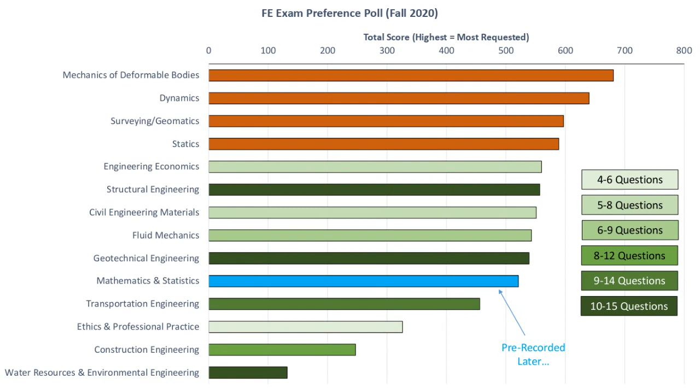All right, let's jump into geotech land. I've got 4 problems, I was gonna do 5 but I'm worried about time. Let me walk through the problems with you, and then we'll get into it. So the first problem, I'd say this is key - very, very high chance you will get a problem like this. This is a soil phase, or index property, problem with air, water, and solids. Here's a sample, here's some properties, compute some other properties. This is a very typical problem on the exam.

The second problem is a classification problem - a soil classification problem. Again, very typical, very high chance you would get a problem like this on the exam.

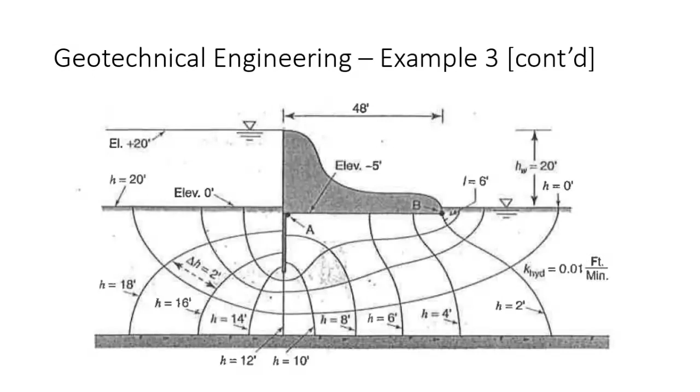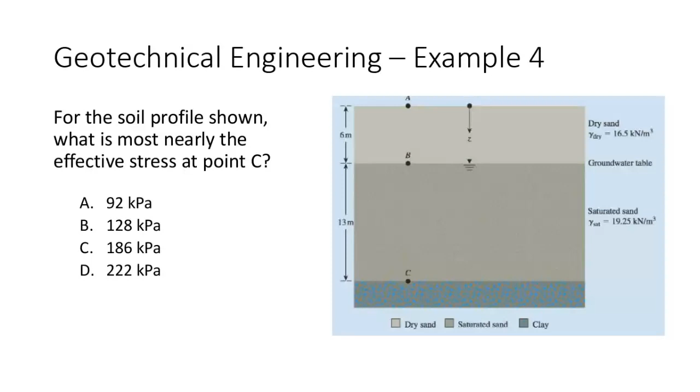The third problem is a flow net. I'm assuming you all have done flow net problems, am I correct? I would say everybody here has experience with a flow net problem. Problem 3 is the same problem - here's a tiny version of the flow net, and here's a bigger one blown up. And then effective stress - I think those are 4 problems that are pretty representative of soils land. Next time we'll try to look at maybe consolidation, maybe some bearing capacity next week, to tie up the big picture. Everybody good?

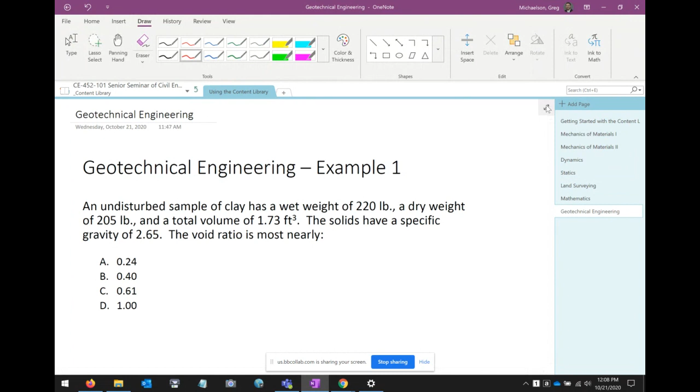So in this problem, we've got an undisturbed sample of clay. It has a wet weight, a dry weight, a total volume. The solids have a specific gravity, and what we're trying to find is the void ratio. This is sort of the way that I learned it - I'm not sure how you learned it. Let me make sure my pen's up. This is how I always learned to do it.

The first thing I would do is draw myself a little column of soil. Let's say this is my soil sample. The soil sample has 3 quantities: it has air, it has water, and it has solid. What I would then do is pick the right side and put all the volumes, and over here put all the weights. You could do this in terms of weights or in terms of mass - everything we were given here was in terms of weight, so that's the easiest way to go about it. So over here on the left, let's start with the left first. Okay, so here's this, here's this, here's this, here's this.

Let's start filling in some things that we know. This problem told us that we have an undisturbed sample of clay, and it has a wet weight of 220 pounds and a dry weight of 205 pounds.

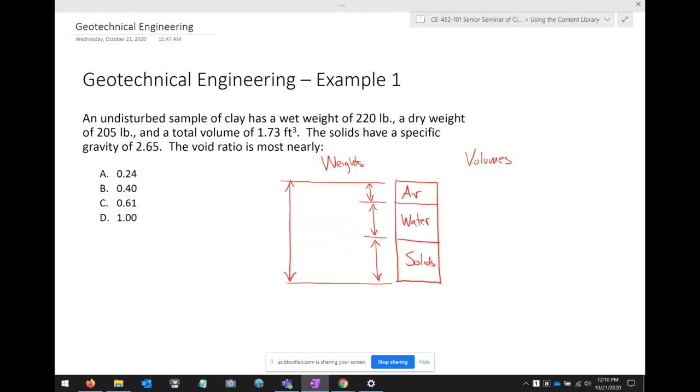The total weight is the wet weight. That's exactly right, so we'll call this WT, 220 pounds. And then the dry weight is the weight of the solids. There we go. So this is the weight of the solids, and this is 205 pounds.

So right off the bat, can we determine the weight of the water and the air? Well, first off, what is the weight of the air? At zero. There you go. The air has no weight. It doesn't mean it doesn't have volume - that's a different story. But it doesn't have a weight.

So what's the weight of the water? If the total weight's 220, so we've got a sample, yeah, it's 15 pounds. You take a sample, put it in the oven, evaporate the water, and it reduces by 15 pounds. That was how much water was in it.

Okay, now let's see what we can do over here with the volumes. Now, one of the things we do know right off the bat is we do know the total volume. The total volume was given to us, that's VT, and that's 1.73 cubic feet. Now, we don't know the volumes of each of the individual components - we don't know volume air, we don't know volume of the water, and we don't know the volume of the solids. But that doesn't mean we can't figure them out.

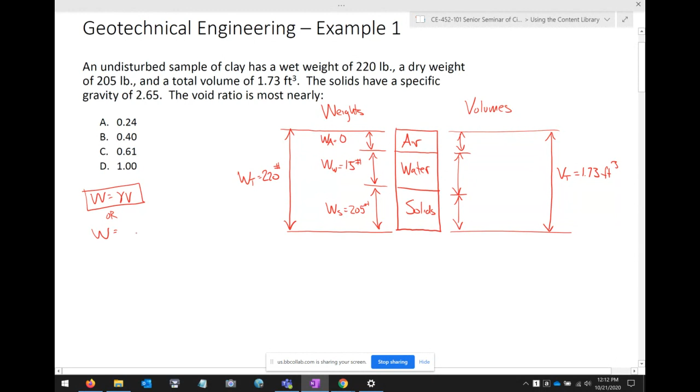So, for example, let's take the volume of the water. We're using a pretty fundamental relationship: the weight is gamma times the volume, or weight is the specific gravity times the gamma of water times the volume. We can write it that way as well.

Either one works. So therefore, I could determine the volume of the water by taking the weight of the water divided by the gamma. But remember, specific gravity of water is just 1.

So the weight of the water was 15 pounds, and then the unit weight of water - y'all better know that number, it should be burned into the back of your memory by now. What is the unit weight of water in American units? There we go, 62.4 pounds per cubic foot. When you chug it out, it's 0.24 cubic feet. So the volume of the water is 0.24 cubic feet.

All right, what about the volume of the solids? Well, what I'm going to do for the volume of the solids is take the weight of the solids divided by the gamma of the solids. The problem is I was never given the gamma of the solids on this problem, but I was given the specific gravity of the solids. So I can say the weight of the solids divided by the specific gravity times the gamma of H2O.

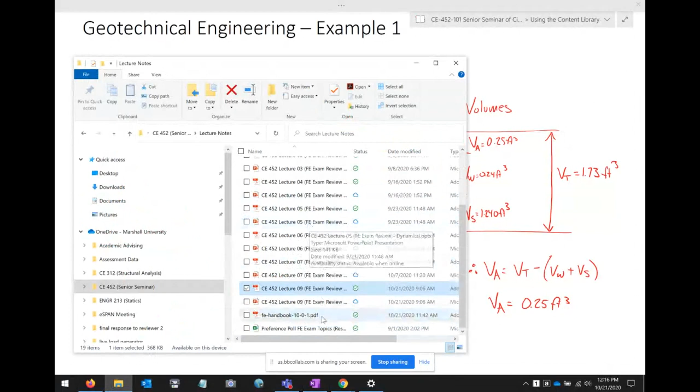Remember, you do have this FE reference handbook. Remember that?

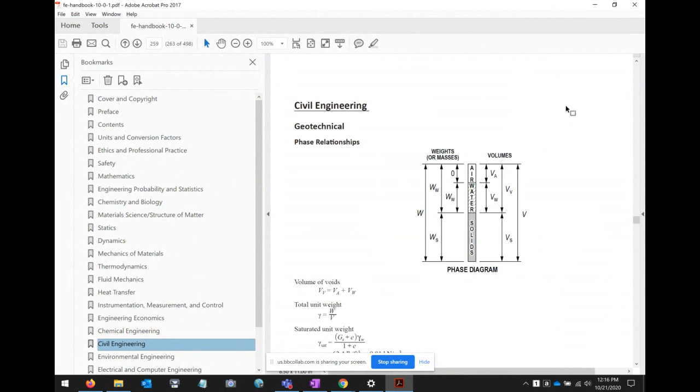The void ratio is the volume of the voids divided by the volume of the solids. It's right here in the civil engineering section of the reference handbook, literally the first section. And what is the volume of the voids? It's the volume of the air plus the volume of the water. So therefore, the void ratio, volume of the voids over volume of the solids, is the volume of the air plus the volume of the water over the volume of the solids.

So that's 0.25 plus 0.24 over 1.24. When you chug that out, you get 0.40.

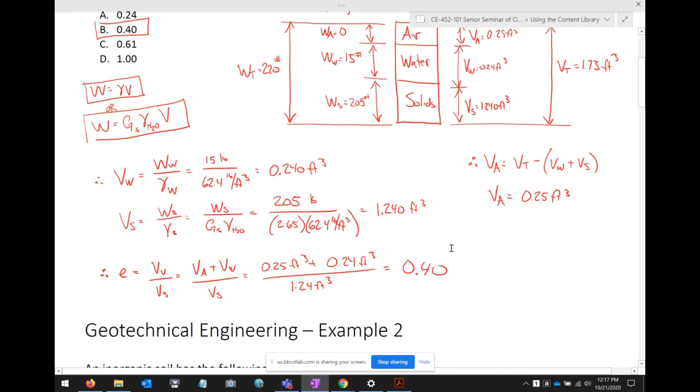All right, are there any questions on that? Hopefully that's like shaking the rust off, if you will, on the geotech stuff. Let me move this down a bit so I can scroll this up and give you all a second to see if you're wanting to copy this down. Any questions?

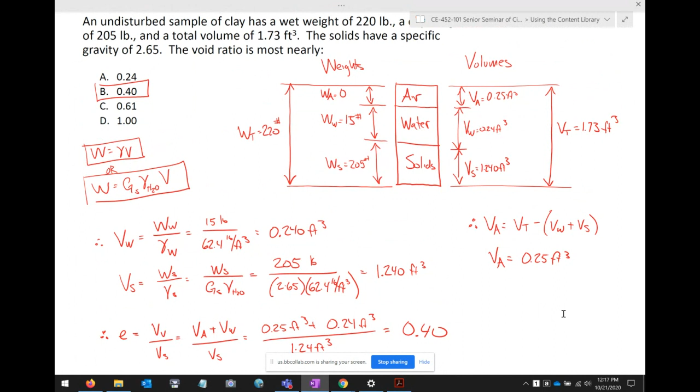Oh, sorry, I keep scrolling. I don't know what's going on. My tablet's being very sensitive today.

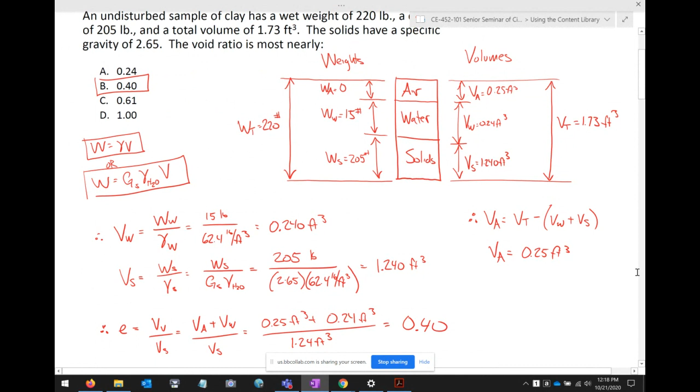Okay, let's get into problem 2. This is another problem, maybe not using this system, but the concept of classifying a soil. This is very typical of something you would get on the exam - you're given a soil with a set of properties and then determine its classification. So an inorganic soil has the following characteristics: 69% fines, a liquid limit of 72, and a plastic limit of 48. Using the USCS system, Unified Soil Classification System, what is the soil's classification?

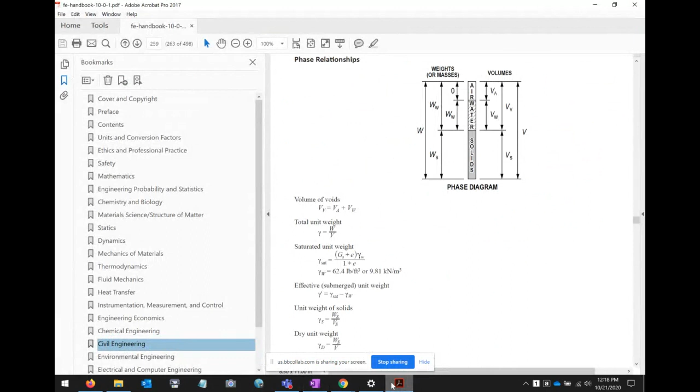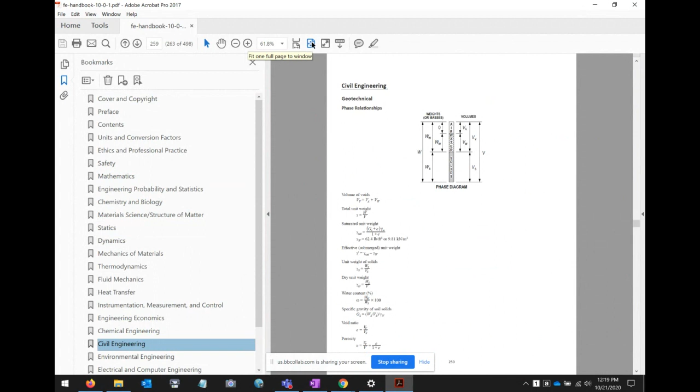So in order to do this, you really need the reference handbook. Let me go to the handbook. Here's the cover, here's the beginning. When you go through the sections and bookmarks, we've got the section on math, statics, and so on. If I go to civil engineering, the first section within civil engineering is geotech, which, by the way, is just generally a good idea to look through because there's a lot of really good stuff in here.

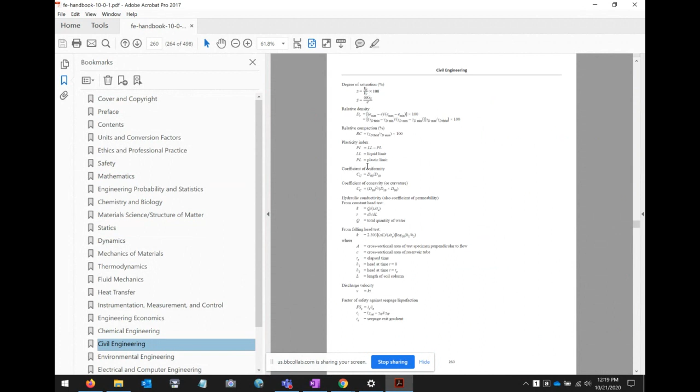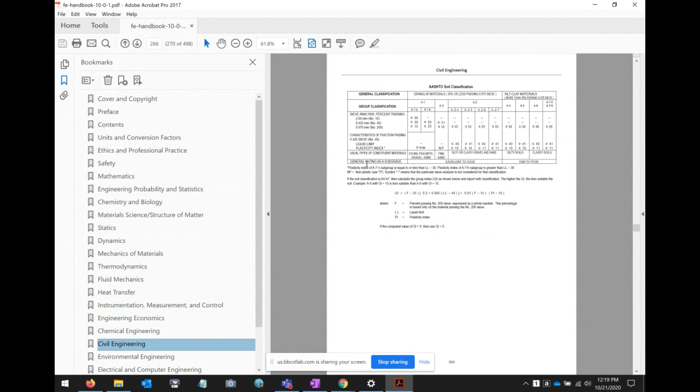You've got soil phase relationships, other index properties of soils, consolidation and settlement, time factors for consolidation, Coulomb failure criterion, horizontal and vertical stress profiles, Ka and Kp for retaining wall folks, ultimate bearing capacity, sliding and slip failures, AASHTO soil classification, and USCS soil classification. So we're going to be using this during this problem.

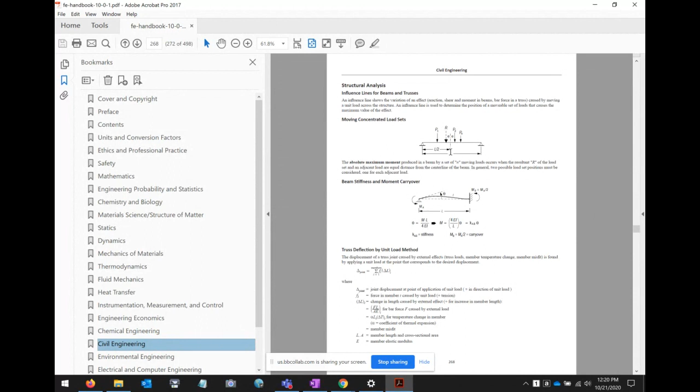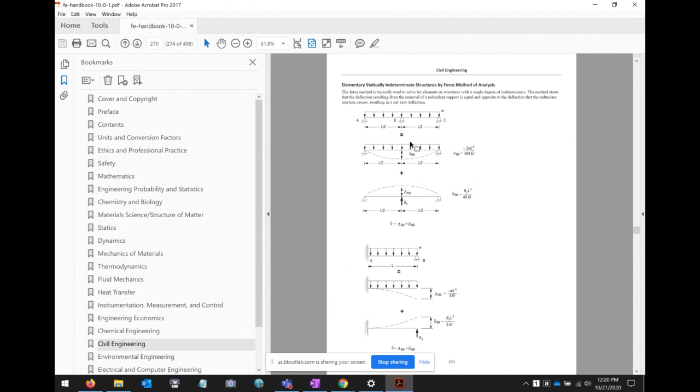If you go into my world in structures land, we have influence lines, truss deflection by the unit load method - the same thing we just got done with for those of you in structural analysis. Frame deflection, beams and frames, the unit load method again. Some stuff in structures we're going to be talking about later. And for those of you who have had steel and concrete, you probably recognize some of this stuff. But let me get back to soils land.

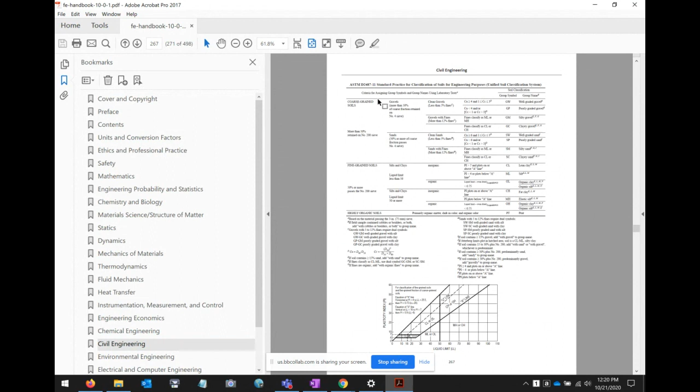For those of you in some of these classes right now, structures or geotechnical, it's worth taking a look at this and going through it - there's a lot of really good data here. What I did on the notebook is screen cap this page and put it here so it's a little bigger so we can read what's going on. Let me actually make this even bigger.

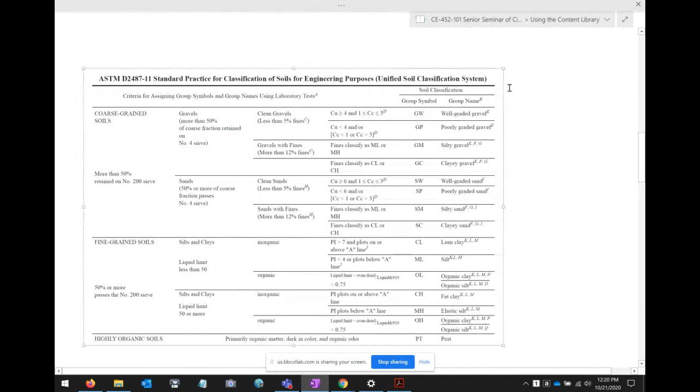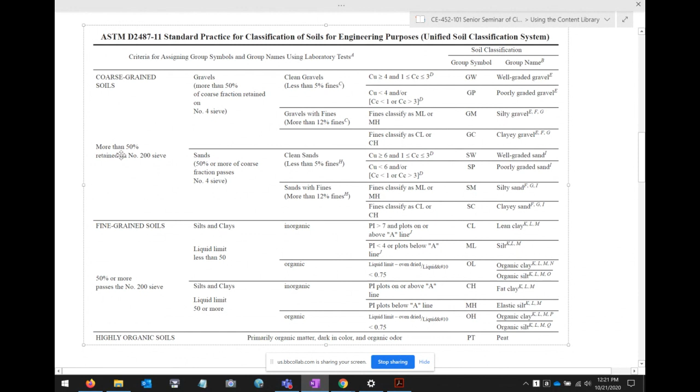Okay, so we've got to classify this soil. Let's see if we can go through this chart and figure it out. If you remember from soils, you basically start at the left and work your way over to the right to get your classification. So first off, starting at the left, are we going to say this is a coarse-grained soil, a fine-grained soil, or a highly organic soil? Well, I can tell you we're not going to say it's highly organic because it literally says it's inorganic right here. So is it coarse-grained or fine-grained? Let's look at coarse-grained - what are the requirements?

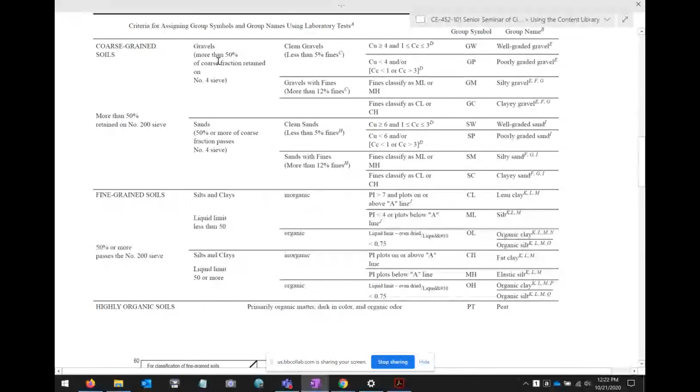It says more than 50% retained on the number 200 sieve. Remember, anything that passes the number 200 sieve counts as percent fines. This is going to be a fine-grained soil because 69% of the soil is fine. So it's not a coarse-grained soil, we're not dealing with a sand. We're dealing with something pretty silty, really tiny particles, so we're definitely going along this line.

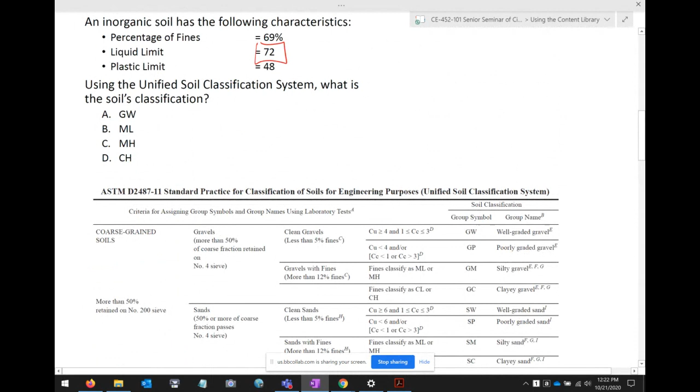So then we go to the next column, and we have to ask ourselves which set of rows do we go through. The question becomes whether or not we're looking at the liquid limit. If the liquid limit is less than 50, we go to the upper set; greater than 50, we go to the lower set. The liquid limit here is 72, so with a liquid limit of 72, we're going to go here.

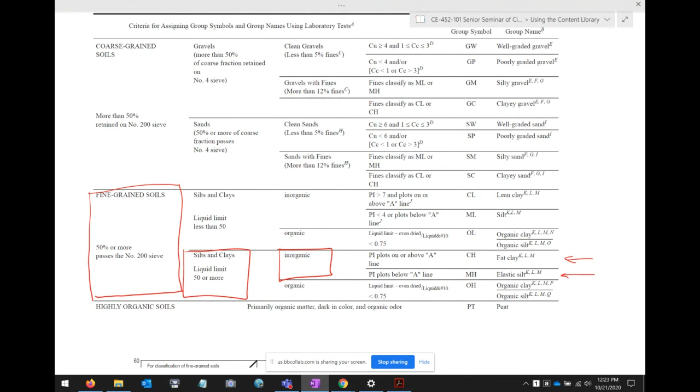And we have the question of whether or not it's inorganic or organic. We already said it was inorganic. Then basically we're stuck with these two choices: the fat clay or the elastic silt. The difference between which one we use is a function of whether or not the PI plots above or below the A line on this chart.

So we need the PI, the plasticity index. Anybody remember how to compute the plasticity index? How do we compute it? Anybody remember that from soils? If you don't remember it, you've got the reference manual. And by the way, everybody in here created an NCEES account - you can download the reference handbook from your NCEES account.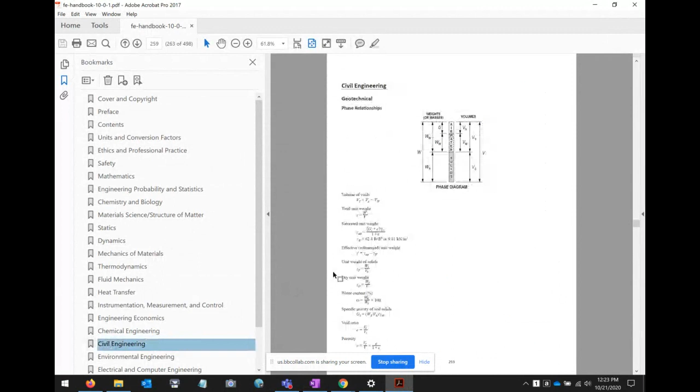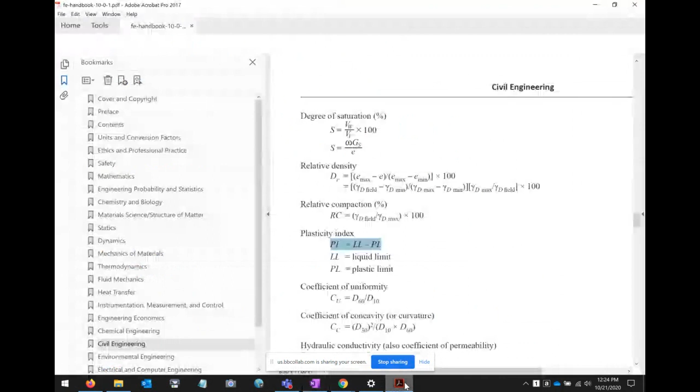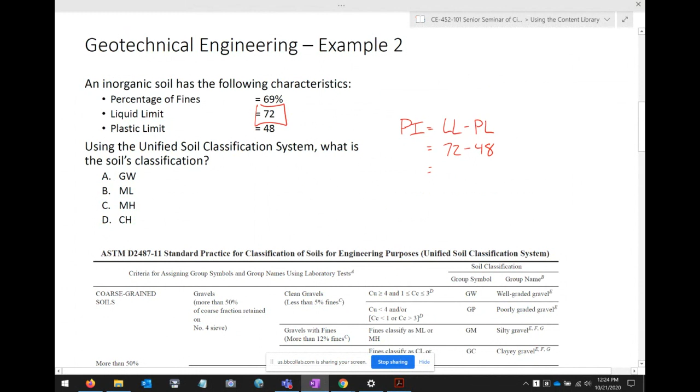Anybody remember this? Let's see. Remember that right there? The plasticity index is the liquid limit minus the plastic limit. So, liquid limit minus the plastic limit: 72 minus 48. So 72 minus 48, what is that? 24, right, 24.

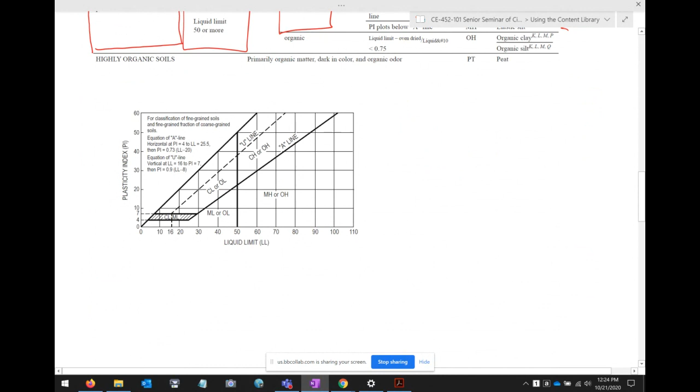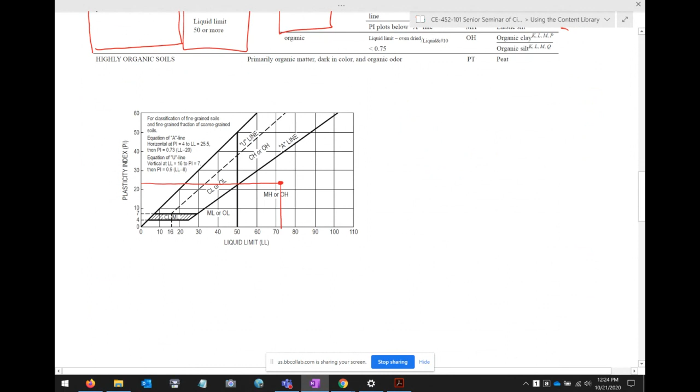So I go down here, the liquid limit was 72, so it's going to be like right here. 24, maybe right there. And so that plots - this is the A line, so we're well below the A line. If we're below the A line, we are dealing with an elastic silt. And so our ASTM classification would be MH.

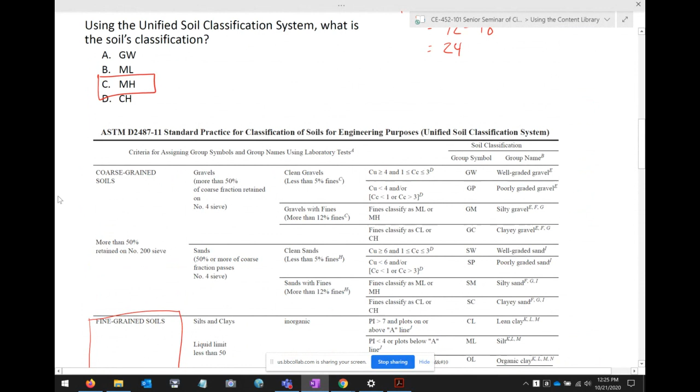C would be our answer. Help me out, I'm not getting a whole lot of response from chat. Any questions on this? Like, is this familiar? I'm a little bit familiar.

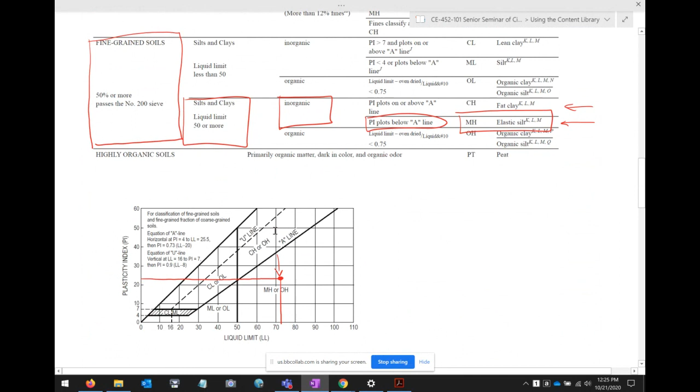By the way, a quick question - yes. I recall that earlier we had, I think, what was it? I think like statics or geomatics, something like that. Well, I think it was surveying. We could eliminate possibilities based on the values given, correct? That's a great point, maybe we ought to look at that. That's a really good point. I don't want to interrupt your question.

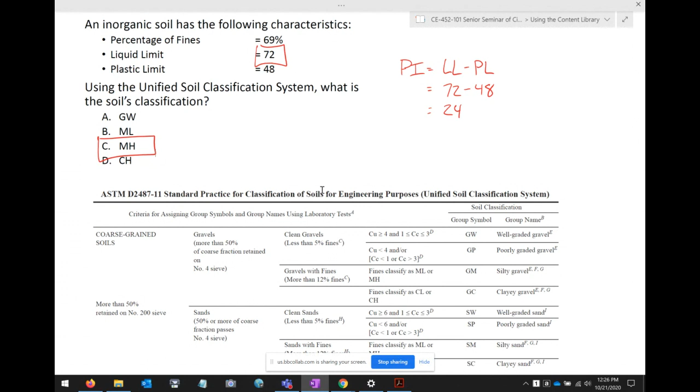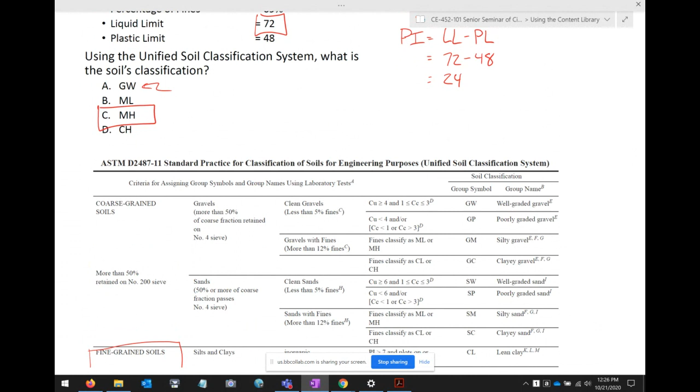But as I see here, we're given characteristics, so in theory we could eliminate some of our possible soil types here. Exactly right. Like, for example, let's take a look at GW. GW is a well-graded gravel, and a well-graded gravel, you're going to be dealing with large aggregate, rocks literally, and that's definitely a coarse-grained soil.

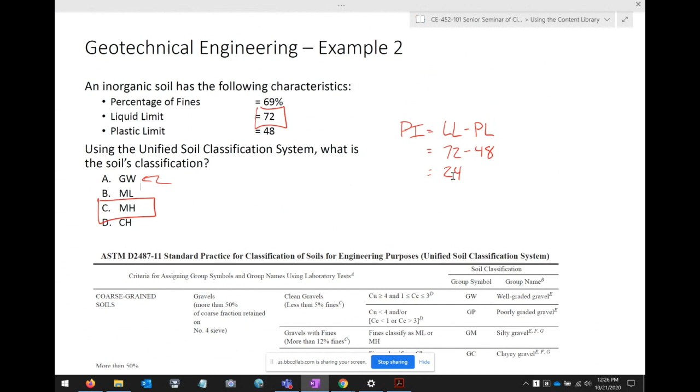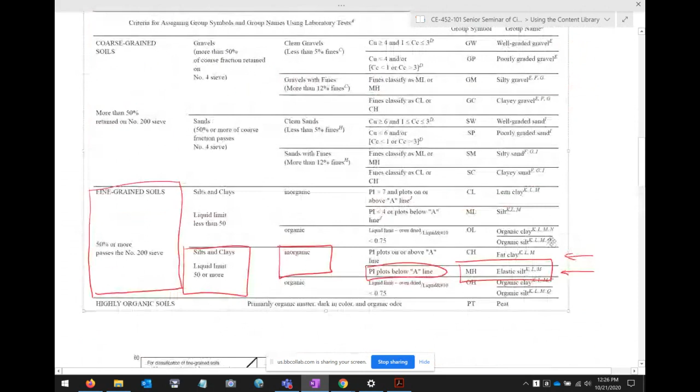And when you take just a look at the percentage of fines - think about the size of the number 200 sieve, it's almost like a fabric that you're pushing the soil through - so it's certainly not that. Now, if we go to ML, that's a possibility. MH is a possibility. CH is a possibility. But like you said, can you eliminate one right off the bat? I think you can eliminate GW right off the bat, just based off of this. That's a really good point, I'm glad you're saying that.

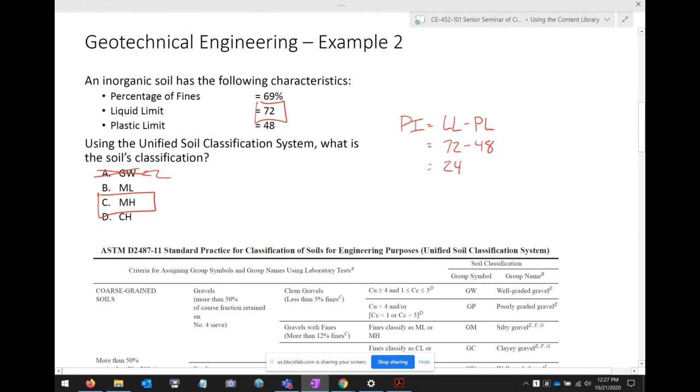Now, likewise, if we're talking about test taking strategy, if we look at problem one, what's one of the answers you can eliminate before you do any math? I mean, it's kind of easy to say that now that we've done all the math, but I'd say D because the odds of it being 1 seem unlikely. You're exactly right, but it's not even just odds - it's the certainty. Remember what the void ratio is: the void ratio is the ratio of the volume of voids to the volume of solids.

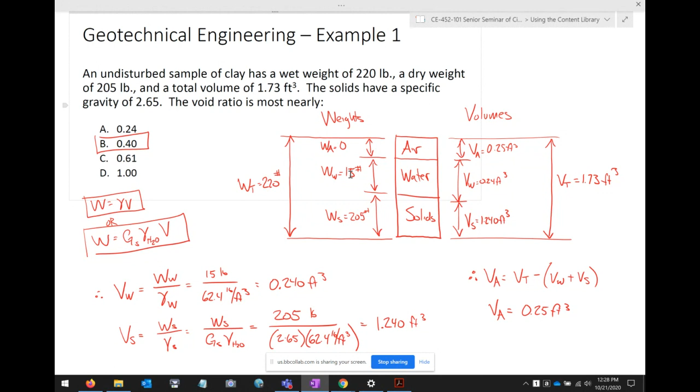So one would say that you've got just as much volume of air and water as you do solids, and that almost doesn't pass the smell test when you look at the numbers. When you have a wet weight of 220 and a dry weight of 205, you didn't cook away 100 pounds of water, you only cooked away 15 pounds. So the idea that it would be one seems to be a stretch, given the numbers.

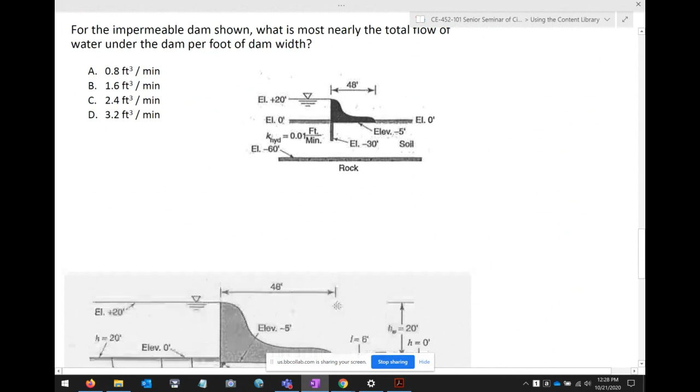These are really good points. Any questions on this stuff? I don't want to rush through this. I know we're limited on time, but I'd rather take the time and do it right. Let me make sure I've got room on these.

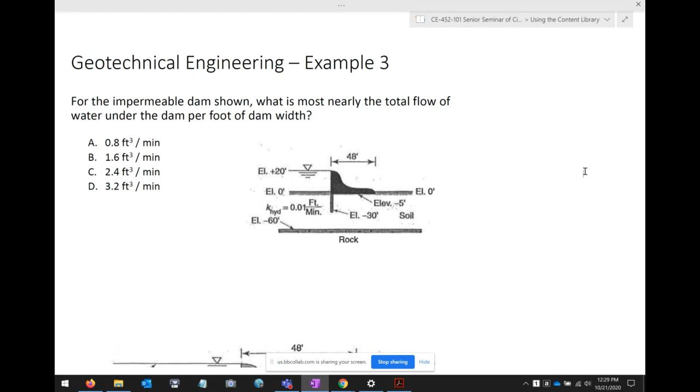If there was one thing in undergrad I was always really bad at, it was drawing flow nets. I knew what it was supposed to look like, I knew what the answer should have been, but getting my hand to come up with something this pretty just didn't happen. They always were ugly. My answer was right, but it just looked really bad. So I assume you've all done flow nets in geotech.

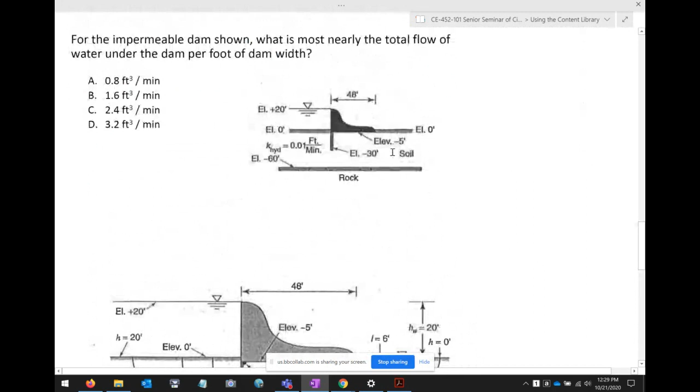What we've got here is an impermeable dam, say a rock dam or concrete dam, something like that. What is most nearly the total flow of water under the dam per foot of dam width? The first thing we should do is remember the base equation for flow nets for determining that flow under the dam.

So it equals your coefficient of permeability, which we're given right here. That's easy. We need your change in elevation, your elevation head, which is pretty easy just from the figure. And then we need the term NF over NB. NF is the number of equal potential flow paths, and NB is your number of drops.

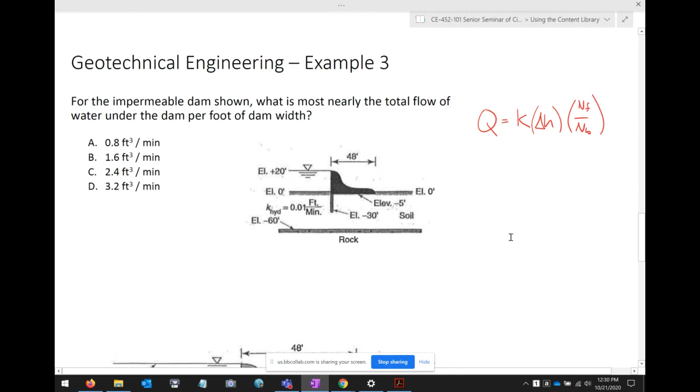So remember how you draw a flow net, and I'm going to demonstrate how bad I am at this now. Let's say you've got some dam, right? Here's the elevation of the water before, here's the elevation of the water after. So that right there, that's your delta H. And this is the base of your channel.

So what you do is you split the path under the dam into a number of equal potential flow paths. Let's say we do 3 — that would be 2 lines. Then you draw your lines so that they're parallel, but they intersect the path on the other end at 90 degrees. Maybe this one goes like that, and this one goes like that.

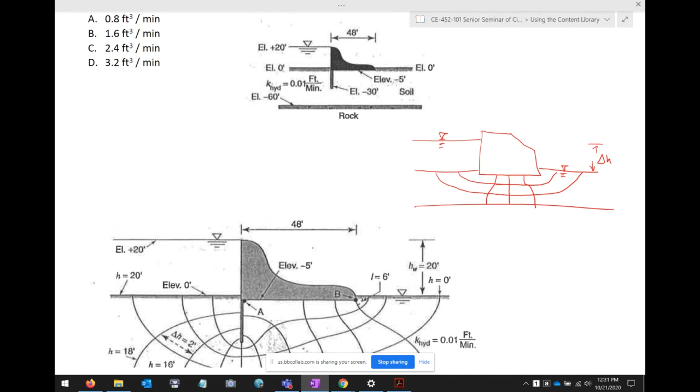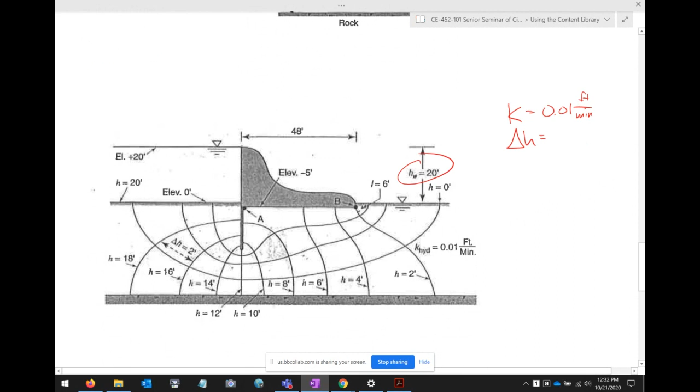Then the next step is to cut that up with the flow paths into equal potential squares. Again, I've always been really bad at drawing this, I'm almost embarrassing myself just drafting it out. But that's the idea — determine the number of drops versus the number of flow paths. If you look at our flow net here, drawn far better than anything I could draw, we've got the K value, which is a hundredth of a foot per minute. We've got the delta H, the total change in elevation, that's 20 feet. What we need are the NF and the NB.

So looking at this flow net, help me out — how many flow channels do we have? The easiest way to determine that is to look right here, under that little sliver of, I guess, a sheet pile wall behind that dam.

Will we have to draw the flow net, or will it be given to us on the FE? You won't have to draw it, I think that's a fair certainty. You'll have to interpret it, and with some alternative question types you might have to point to particular regions on the flow net, but you shouldn't have to draw it. That's why I'm more interested in your ability to interpret it than draw it.

So how many flow paths do we have? What's our NF going to be?

And how many flow channels do we have right here? Four, exactly right, because we've got 1, 2, 3, 4. Now, how many drops do we have?

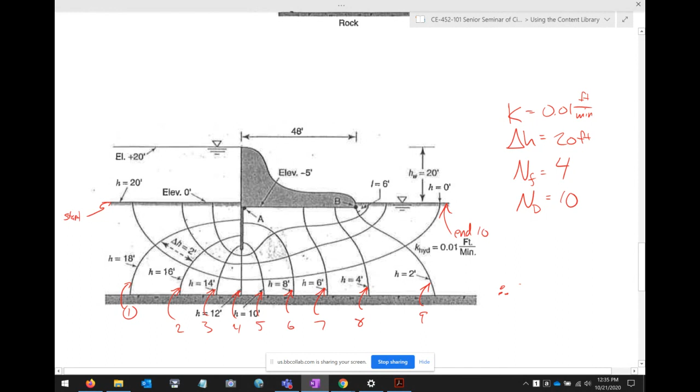So Q is K times your delta H times your number of equidistant flow paths divided by the number of drops. So 0.01 feet per minute, and then 20 feet, 4 over 10. Now if you look at the units, they're going to be feet squared per minute.

And you're like, wait a minute, all the units in the answer are cubic feet per minute. So where's that extra foot come from? Remember, this formula tells you the flow per foot of dam. Remember, the dam extends in and out of the screen forever, so we're just looking at the flow per foot of dam. That's where that extra foot comes in. So when you check that out, 0.01 times 20 is 0.2, times 4 is 0.8, divided by 10 is 0.08 cubic feet of flow per minute.

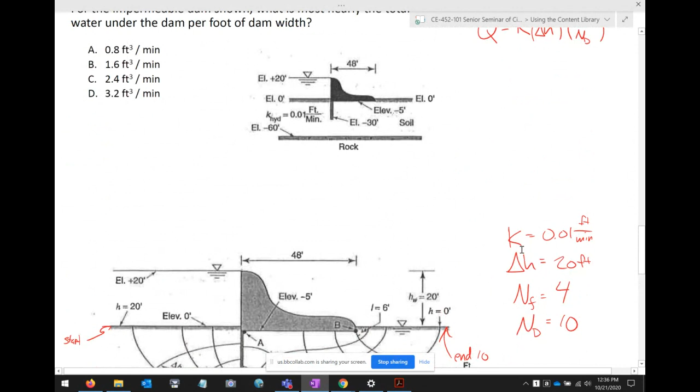Back to the answer. Oh, I know what's wrong. I have a typo in my question because these are off. I apologize for this. These answers were supposed to be 0.08, 0.16, 0.24, 0.32. I remember I had originally typed out this question and had that error and never fixed it. My apologies. They're supposed to be a one-off. Sorry.

But do we generally understand the process? Understand the means of interpreting the flow net? That's really what I'm after.

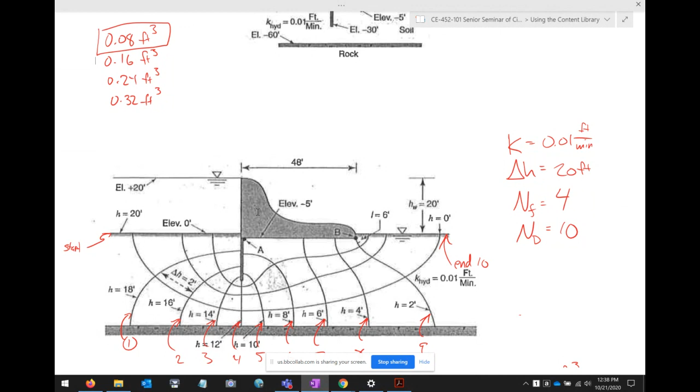Again, I don't see you drawing flow nets on the exam. I mean, you're literally just there with a mouse and keyboard and whatnot. I had an echo there for a second. Any other questions? This is good stuff.

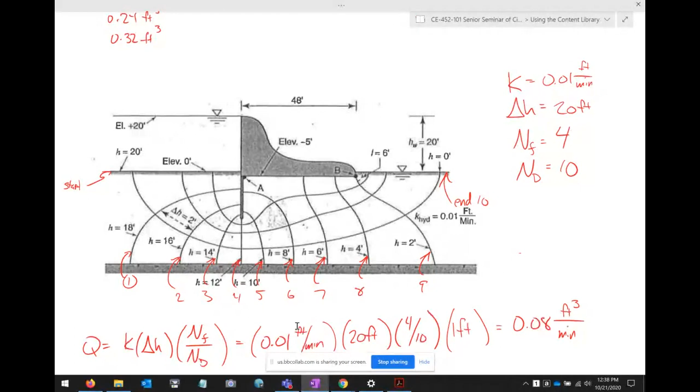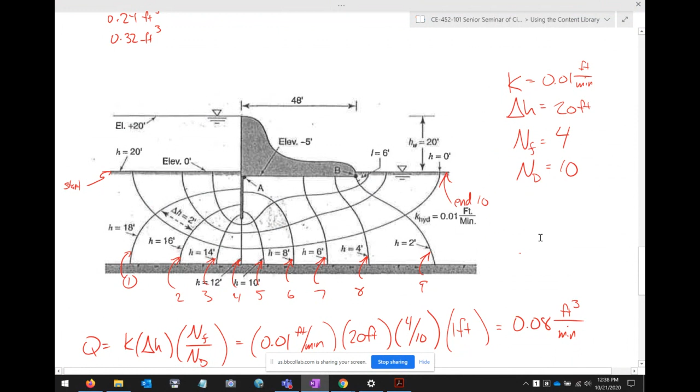Yes, but on the question for a moment here, it seems to me that some of this has to be very the calculations have to go through all the calculations promptly, because this is a very changing situation. So my question is, what kind of problems should we look at if we can't eliminate variables, like the answers here? So for this problem, I'm not sure that you could eliminate choices by just looking at it, and not all problems are going to be like that.

And in that instance, just start doing the problem. But I fear I didn't answer your question. Well, you kind of did, but I'm also curious, like in this kind of problem here, for example, at what points can we start looking at our steps here and determining, oh, this can't be this problem, and it can't be this problem, what the answer meant? Because I think that's just going to vary from discipline to discipline.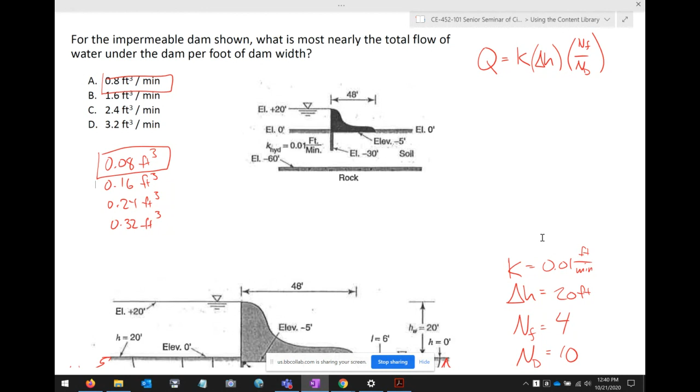Like, here's an example, and I'm going to give you a structures analogy: truss analysis. So if you have a truss here, let me answer it like this. I'll sneak in a tiny truss review. Let me move this down. So let's look at a basic problem.

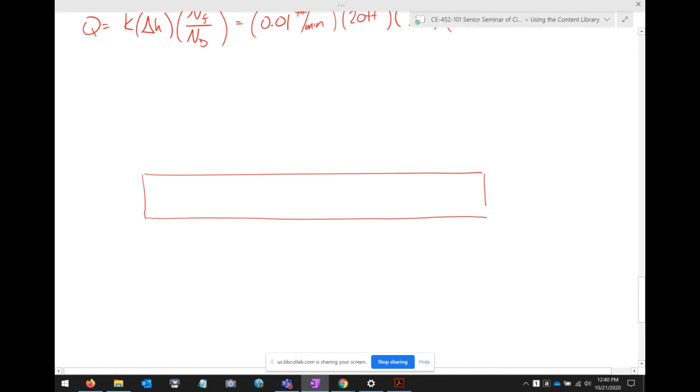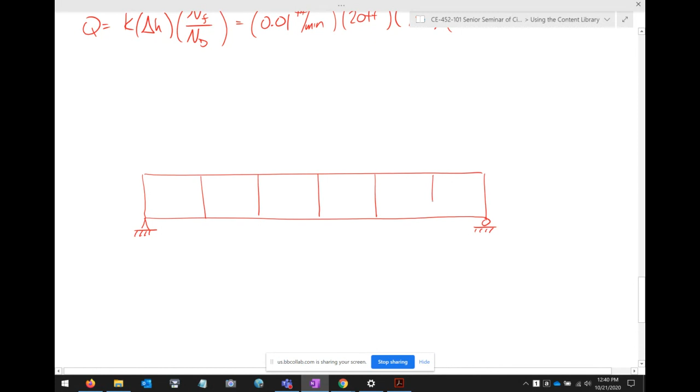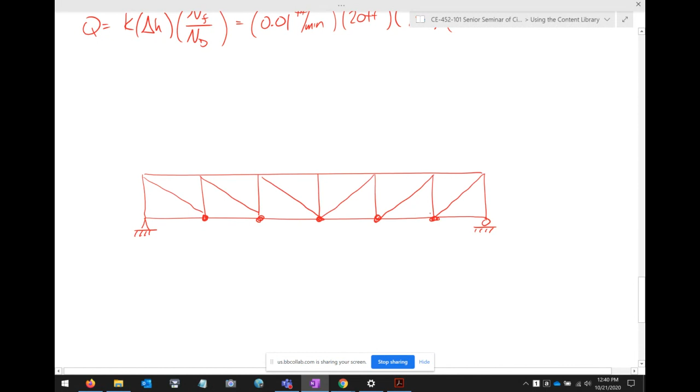Let's take this problem and draw a truss. Let's do this, this, this, and make members like that, members like that, members like that. And let's put our loads like you'd see them in real life, on something like a bridge. Let's put loads like that: 10 kips, 10 kips, 10 kips, 10 kips, 10 kips.

Let's say the test asked you what's in that member. It's a very common problem you'd get on a structures section. Okay, so let's talk about some test-taking strategy. First off, method of joints or method of sections?

I'll fill in my little joint symbols here. Because we've got time, and this is a valuable discussion, I can't help but throw in a structures question. So if I was trying to find the force in that member, what would you use? The method of joints or the method of sections?

I wouldn't use the joints there. The method of joints is going to take a long time. Let's say everything's symmetric. Okay, so that means this reaction's 25 kips, and this reaction is 25 kips.

This is a fair question. Let's put some dimensions on here, just so we're speaking the same language. So 6 at, let's just say 15 foot, is 90 foot. And let's make this 15 foot as well, so all the members are at like a 1-to-1 slope ratio.

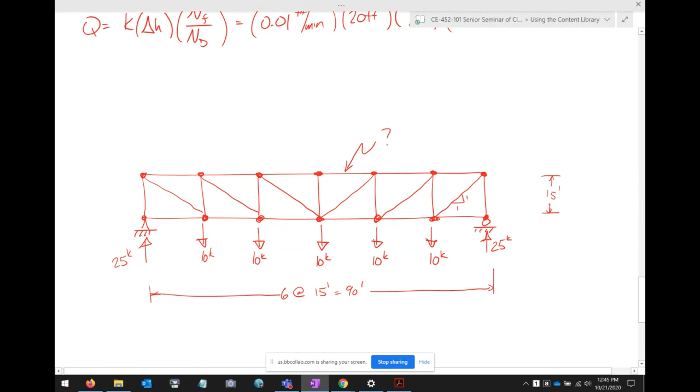If you analyze this truss, what you'll find is that if you look at this diagonal, and this diagonal, the internal forces inside those diagonals decrease as you get closer to midspan. Because if I looked at this as if it was one beam, the shear diagram for a beam kind of goes like that. That's not very symmetric.

That's a horrible drawing, but you find that the internal forces in those diagonals decrease as you get to the middle, because those diagonals in the middle kind of act like your web, and they kind of carry the shear.

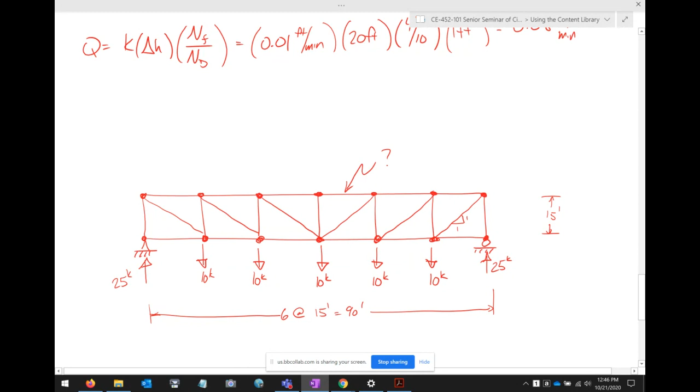So to go back to Mr. Adkins' point, first off, there's strategy, and that's going to change from discipline to discipline. You're going to attack fluids problems differently than you're going to attack structures problems. But the second is just seeing if you can understand behaviorally what's going on. For instance, for those of you in structures now, can you identify any zero force members? Anything you can do to make the problem easier is definitely something you're going to want to do.

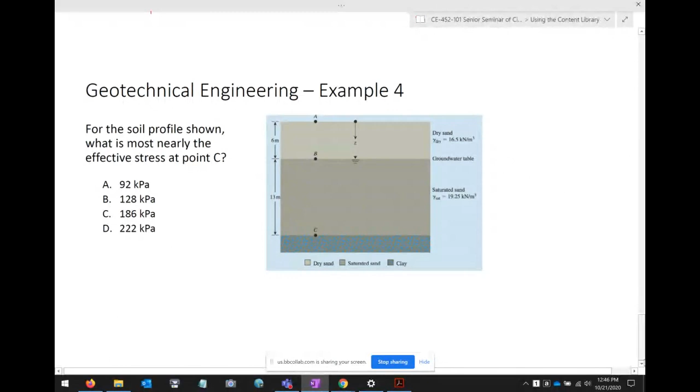We only have like 4 minutes, and I want to really quickly knock out this effective stress problem. So for the soil profile shown, what is most nearly the effective stress at point C? Let me blow this up a bit because that text is kind of tiny. So I have a column of sand, and there's a groundwater table in the middle, and I want to determine the stress right here.

Because that's sand, and because I've got the groundwater table, above the groundwater table I'm saying that I'm dealing with a dry sand, but below the groundwater table I'm dealing with a saturated sand. So in order to determine the effective stress, remember the key word is effective stress, not total stress. Does anybody remember how to compute effective stress? You take the total stress, but then you subtract your pore water pressure, your u, or whatever symbol you use. U is very, very common.

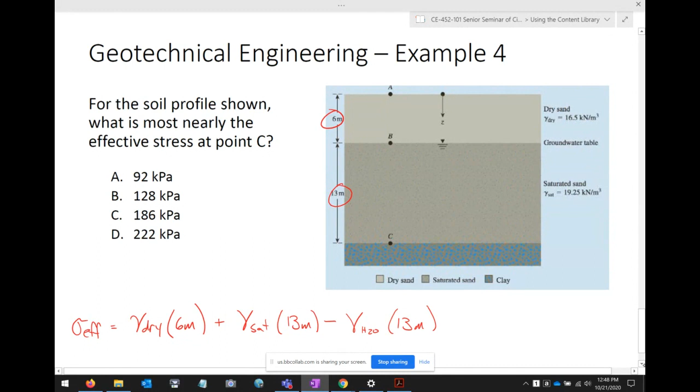So the way that we would handle this, and it's pretty basic - this problem's really quick - we would say our effective stress is going to be gamma dry times 6 meters plus gamma sat times 13 meters, and I'm getting that from here and here, minus gamma H2O times 13 meters. Or, if you want to be a bit lazy, you can say gamma dry times 6 meters plus gamma sat minus gamma H2O, times 13 meters. So that's just me doing a little bit of factoring there.

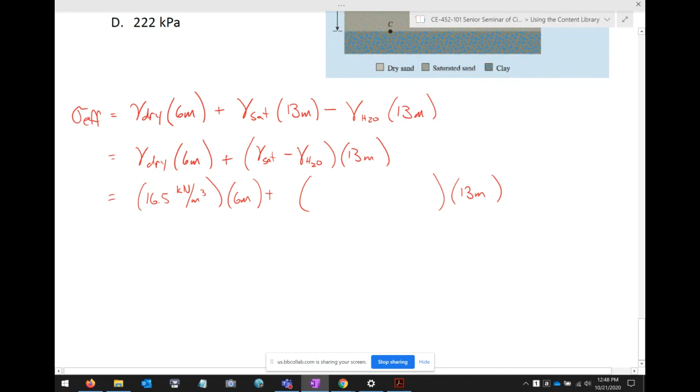So gamma dry is 16.5, plus, and then a bunch of junk times 13 meters. The gamma sat is 19.25 - that just comes from right there, I'm not pulling that number out. Minus the unit weight of water. What's the unit weight of water? Last question for you.

Mr. Schwartz is dead on. It is not 62.4 because that's U.S. units - we're dealing with SI, 9.81. And so when you plug and chug that out, you get kilonewtons per meter squared. Remember, kilonewtons per meter squared is a kilopascal. And so we get 221.7.

That's an easy one, but I think it's important to understand effective stress, because I think the problems - and not just this one, but the problems that I've done today - I'm not saying you're going to have problems exactly like them, and I don't think I would presume to make that prediction. But I think the concepts we're talking about here are very ripe for selection on the FE exam.

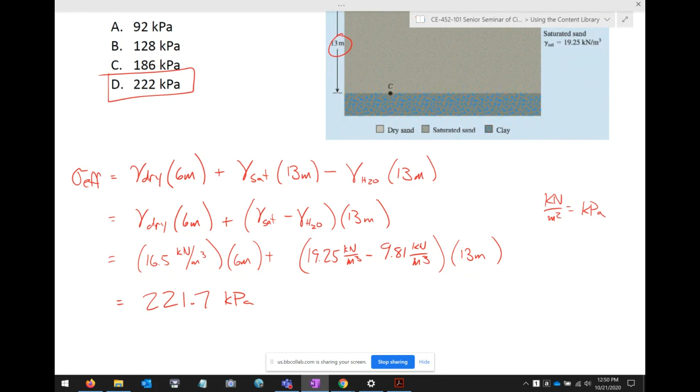And what we'll do next week is we'll add to this by talking about some other - I won't say advanced topics - but some additional topics that will maybe fill the geotech picture up. I'm not covering everything, but I'm covering enough that I think you can take an honest stab at this section of the exam.

I want to make sure that I increase your bearing capacity for this section of the exam. I had to sneak in another one before we closed it out. Okay, any quick questions before we call it?

Michael said something in chat, I'm trying to get what it means... Okay, bearing capacity. Basically, what he's saying is that I'm a dork, which is kind of true. I'll admit it.